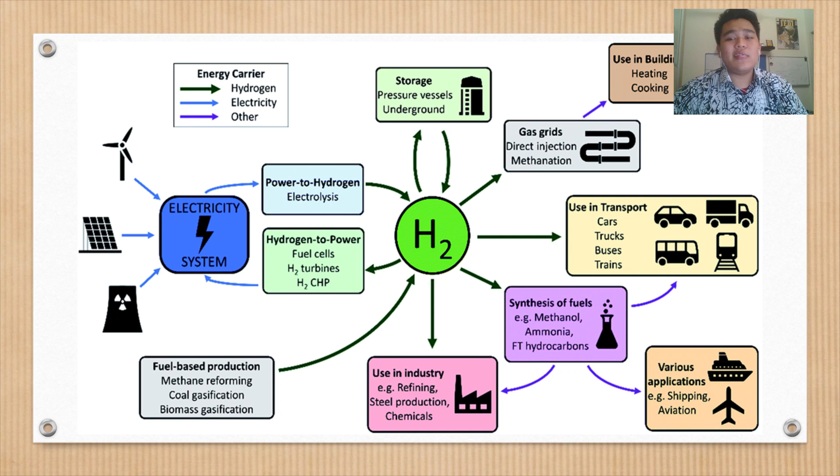Hydrogen is one of the leading alternatives for renewable energy resources to meet the high demand of energy across the globe. It has one of the highest demands in the chemical industry, 90% of which comes from fossil fuel derivatives such as methane, methanol, ammonia, and so on. It also has many other applications, such as storage, gas grids, and the electricity system.

Steam methane reforming, also known as SMR, is a catalytic process that involves a reaction between hydrocarbons such as methane and steam. The result is a mixture of hydrogen, carbon monoxide, carbon dioxide, and water produced in a series of three reactions.

Methane reacts with steam at 700 to 800 degrees Celsius. The SMR process is endothermic and requires additional heat to proceed. Therefore, a furnace is introduced to provide heat to the reformer. The reformer reactor accomplishes most of the methane reforming.

As for the water-gas shift reaction, this process is utilized to increase the hydrogen content, and the reformer products are fed to a WGS reactor where CO plus water produces CO2 plus hydrogen. The WGS is exothermic in nature.

For the type of reactor, a packed bed reactor is used as the reformer for both the SMR and WGS processes. This is because PBR is equipped with a catalyst bed, and since SMR is a catalytic process, PBR is chosen to ensure that the reaction occurring within the reactor is efficient. PBRs are tubular and filled with solid catalyst particles inside, and are most often used to catalyze gas reactions, with the chemical reaction taking place on the surface of the catalyst.

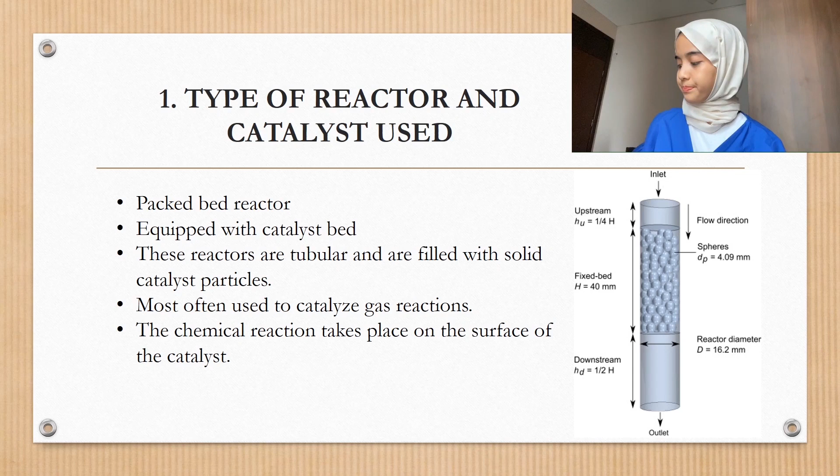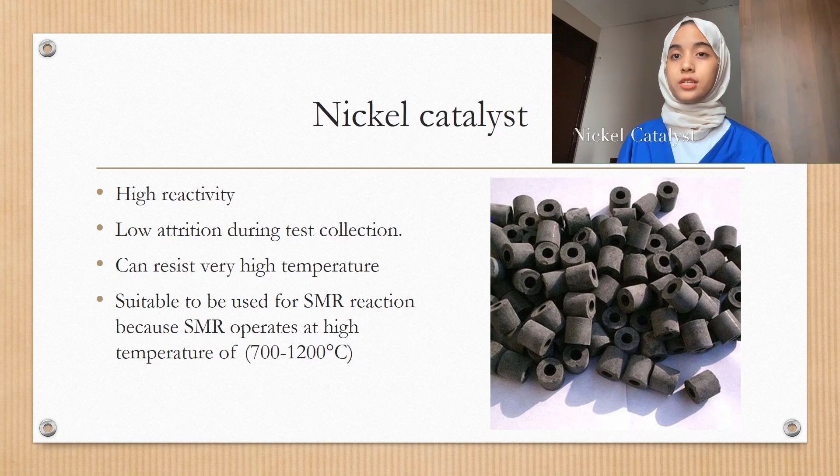The catalyst chosen is nickel because it has high reactivity, low attrition during test collection, and can resist very high temperatures. It is suitable for the SMR reaction because SMR operates at high temperature, between 700 to 1200 degrees Celsius. Next, how the packed bed reactor works for hydrogen production.

A typical packed bed reactor consists of a chamber, such as a tube or channel, that contains catalyst. The fluid interacts with the catalyst across the length of the tube, altering the chemical composition of the substance. For example, here for SMR, the reactants are methane and steam.

The methane and steam enter the tube and pass through this bed of catalyst, and this catalyst that we chose is nickel. This nickel will alter the composition of the reactants to produce our desired products, which is carbon monoxide and hydrogen.

The chemical reaction takes place on the surface of the catalyst, and the conversion is based on the amount of solid catalyst rather than the volume of the reactor. Therefore, it is important to determine the right amount of solid catalyst needed.

Tubular packed bed reactors with small diameter have the advantage of providing the highest surface to volume ratio. This results in decreased mass transport and heat transport resistance, making them attractive for achieving efficient thermal and mass transfer rates. Turbulent flow is preferred because we need that turbulence to ensure a perfectly mixed flow, to ensure we get high conversion of reactants to produce a higher yield of our desired products.

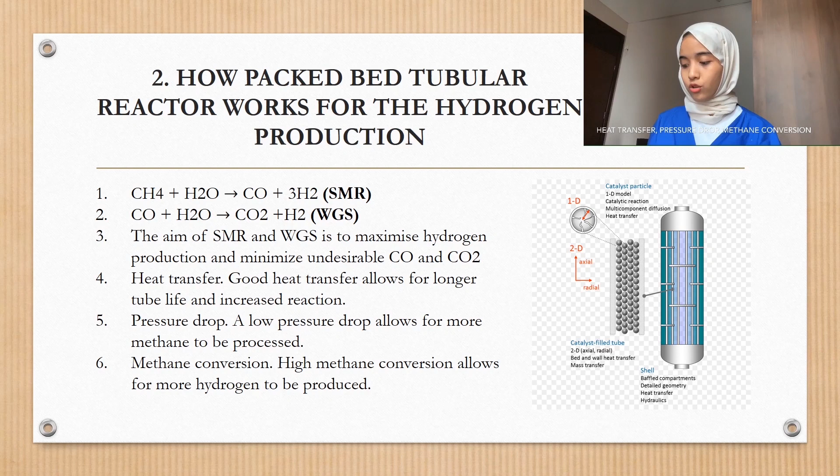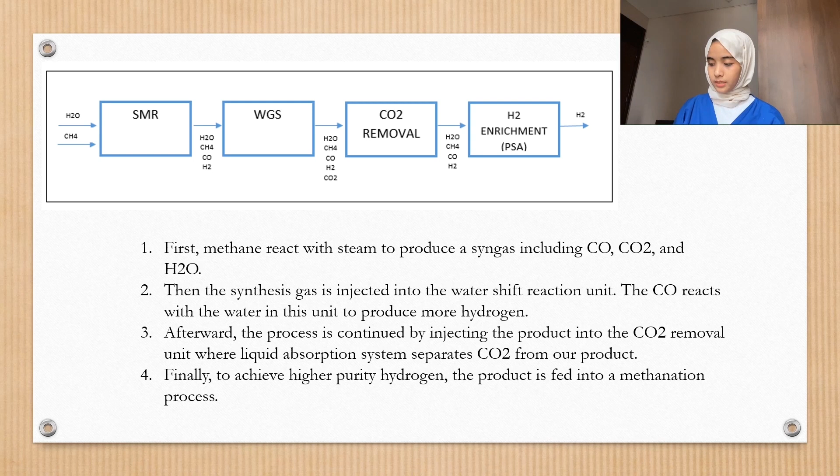Next, the process continues by injecting the product into the CO2 removal unit, where an absorption system separates CO2 from our product. Finally, to achieve higher purity of hydrogen, the product is fed into a methanation process.

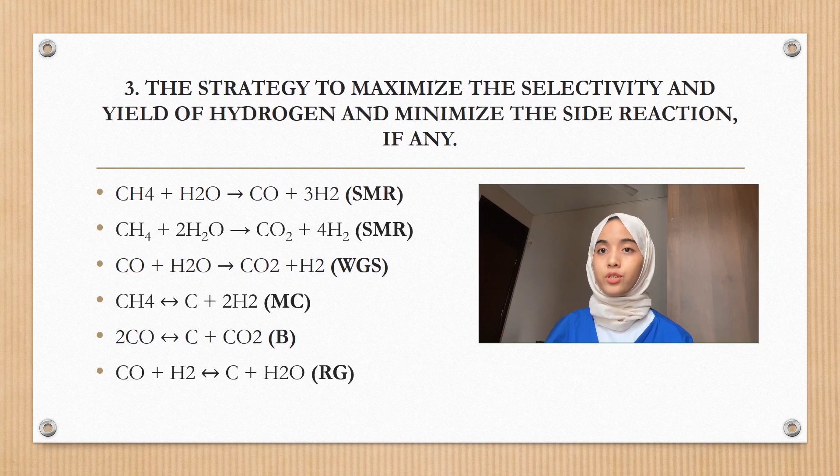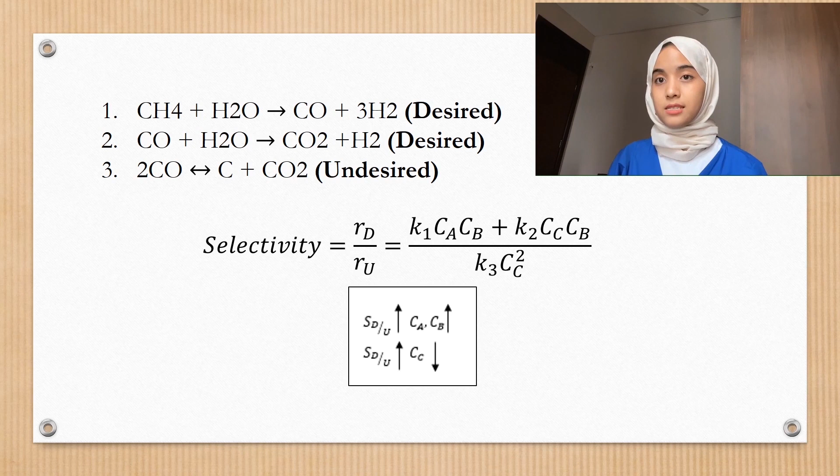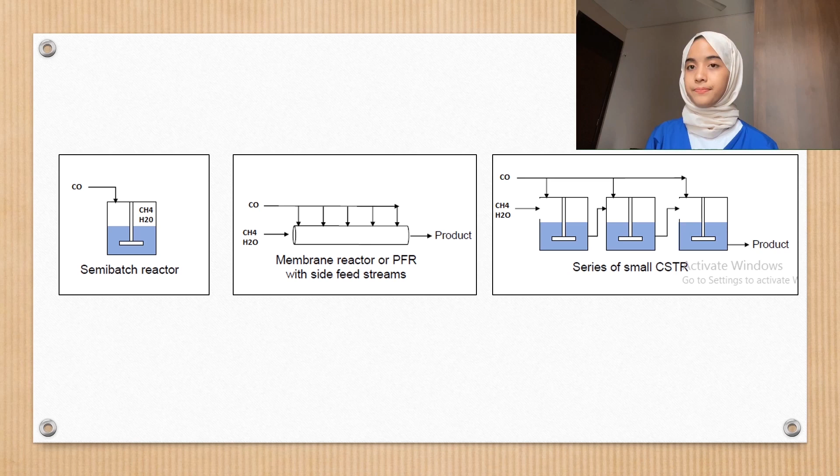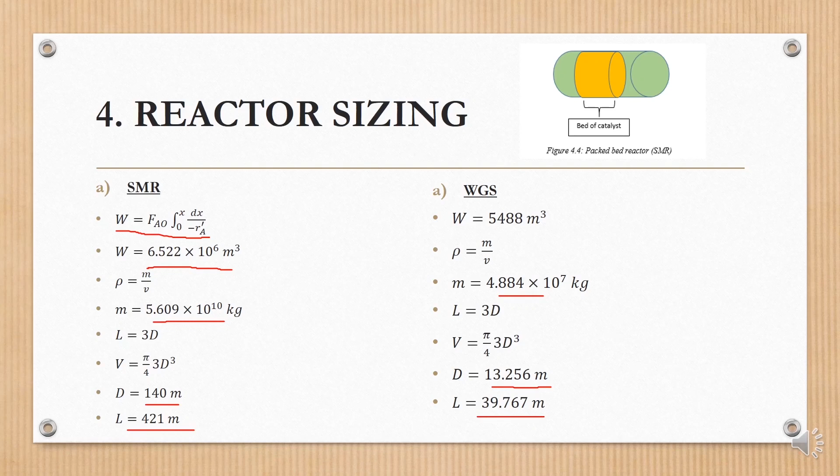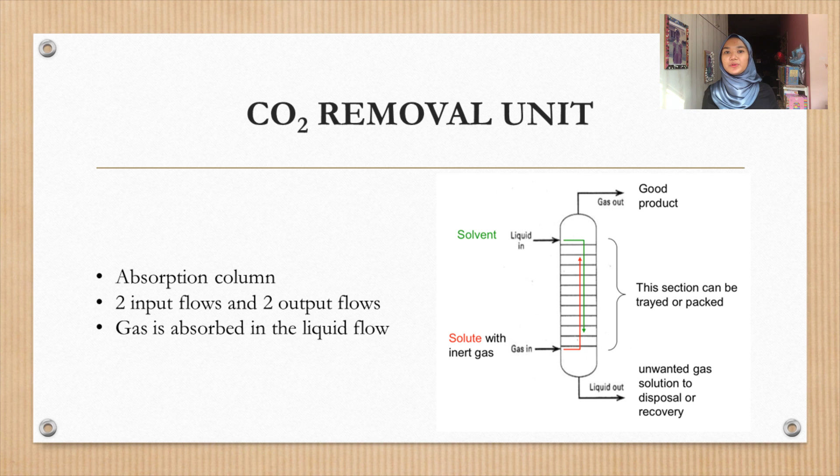Moving forward to our next column, this is the carbon dioxide removal unit. This particular unit is going to follow the application of an absorption column. Because it's an absorption column, there are going to be 2 input flows and also 2 output flows. In a typical absorption column, the gas from one of the input flows is going to be absorbed by one of the input liquid flows. Basically, if you look at this diagram, this is our schematic diagram for this particular system, where, as I said earlier, the gas is going to be absorbed by the liquid.

So basically in this situation, the gas is going to be carbon dioxide gas, and the liquid solvent, after having a thorough research, we have come to a conclusion that we're going to pick tetraethylene pentamine, or short form TEPA, as our liquid solvent.

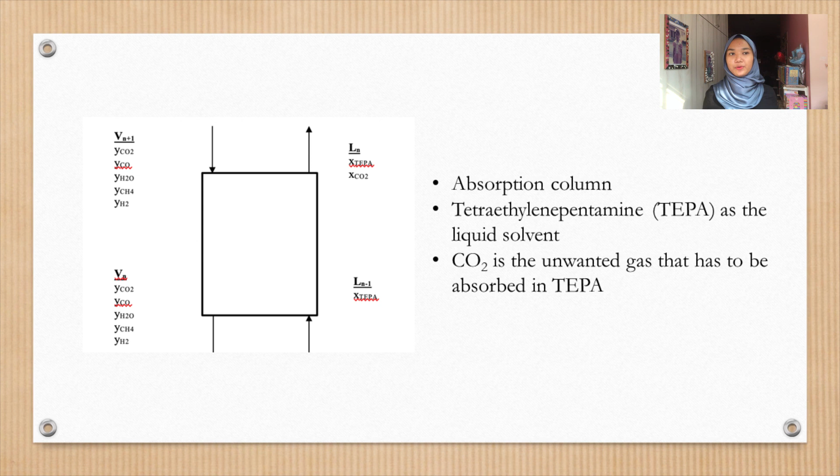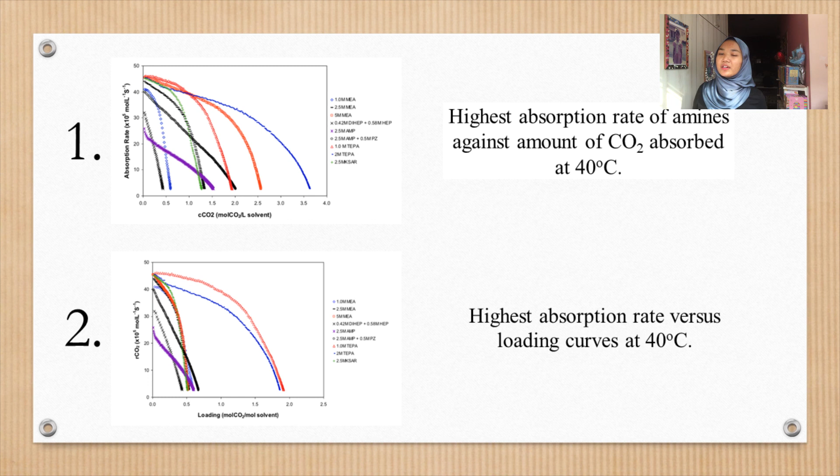Okay, so after picking our liquid solvent, we have to make our assumptions so that we can ease our calculations later on. I'm just going to highlight a few important assumptions.

One of them is that other components in the system are not going to be affected by the absorption process, meaning that this particular CO2 removal unit is just going to affect the amount of carbon dioxide and also the TEPA. So the amount of carbon dioxide entering is going to be larger than the amount exiting, hence carbon dioxide removal. Also, another assumption is that the amount of TEPA entering the column is going to be equal to that exiting, so it's going to make it easier for us to calculate at the end of the day.

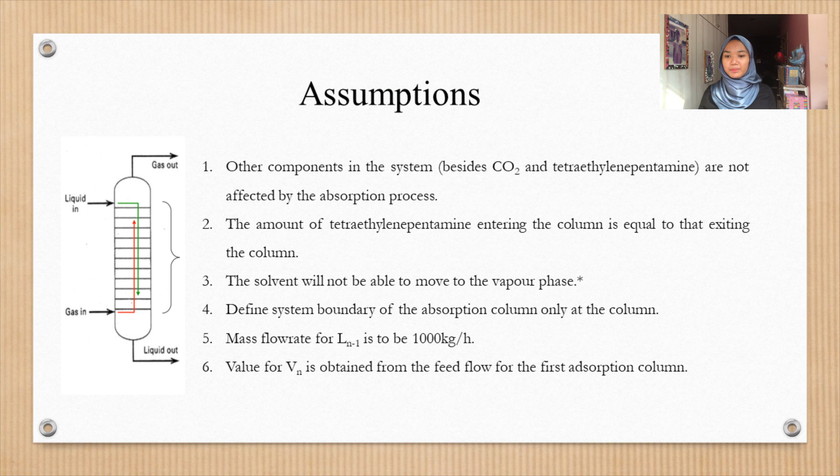And also we have to make sure that we define the system boundary as only the part of the column, so that nothing else like the surroundings is going to interfere with our calculation. Yes, the others are also important, but I'm not going to highlight them in this presentation.

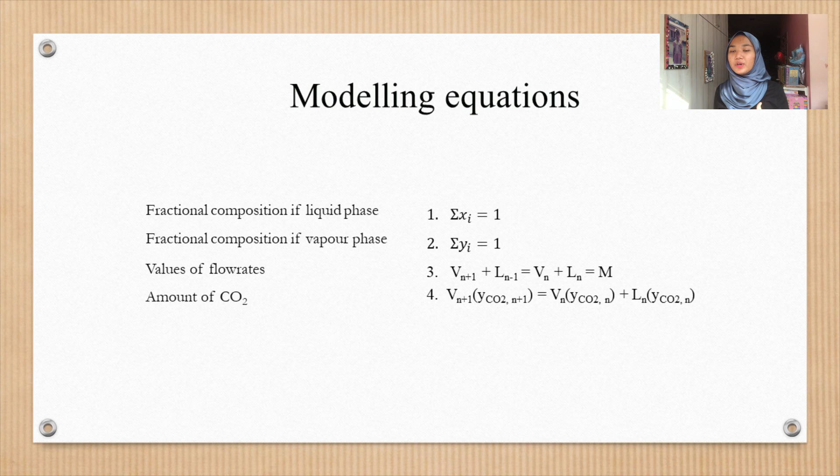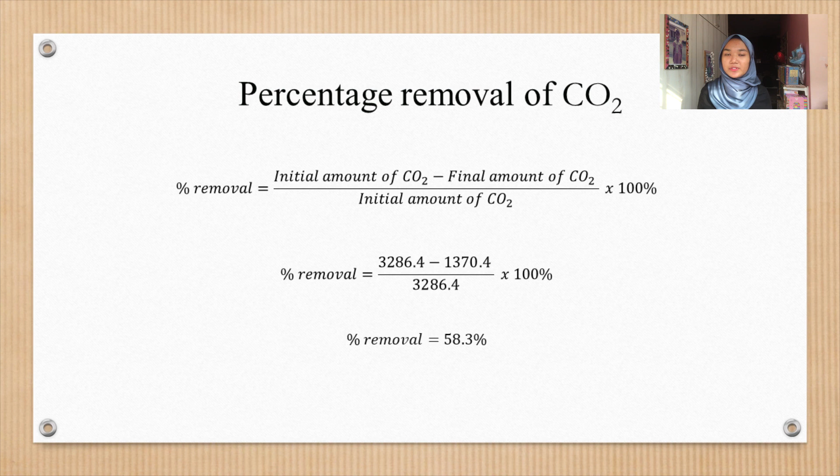Okay, so once we are done with all these calculations, we have to conclude on the efficiency of our carbon dioxide removal unit. Because of that, we have to count the percentage removal of carbon dioxide, which, from this particular situation, after calculating, our percentage of removal is 58.3%, and that is quite high for the removal of carbon dioxide.

That's all. The upcoming slide shows the selection of adsorbent, which is activated carbon and zeolite. It is essential to determine the types of adsorbent used, as it affects the overall rate of adsorption and overall plant efficiency.

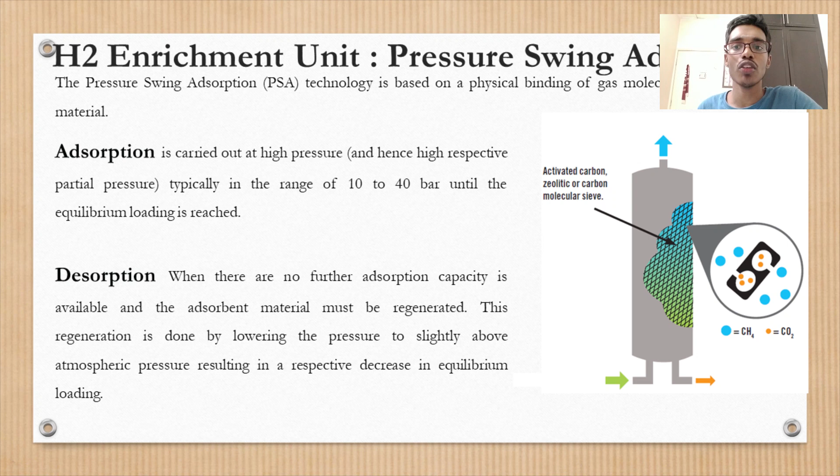The activated carbon has a greater surface area and microporous ability, which is why it is a very good adsorbent. It involves precise regulation of regeneration cycles. Its adsorption capacity is highest for CO2, followed by CH4, CO, N2, and finally H2. This suggests its selectivity towards CO2 is very high, while its selectivity to H2 is very low. Thus, the activated carbon will only adsorb a minuscule amount of hydrogen in its loading capacity.

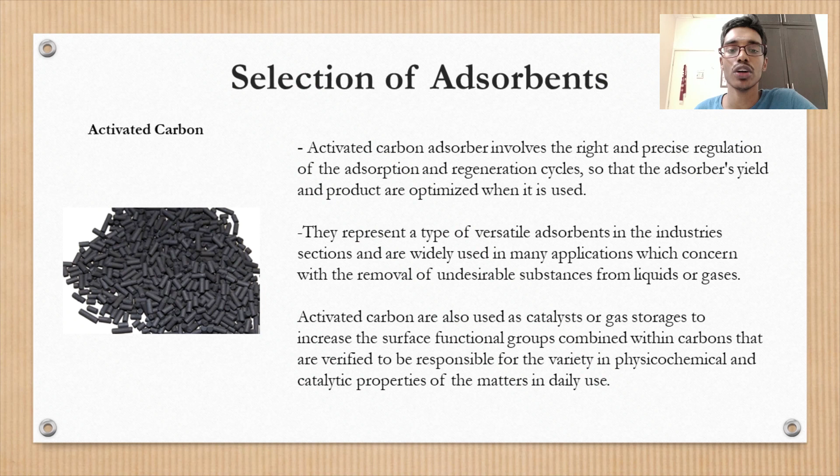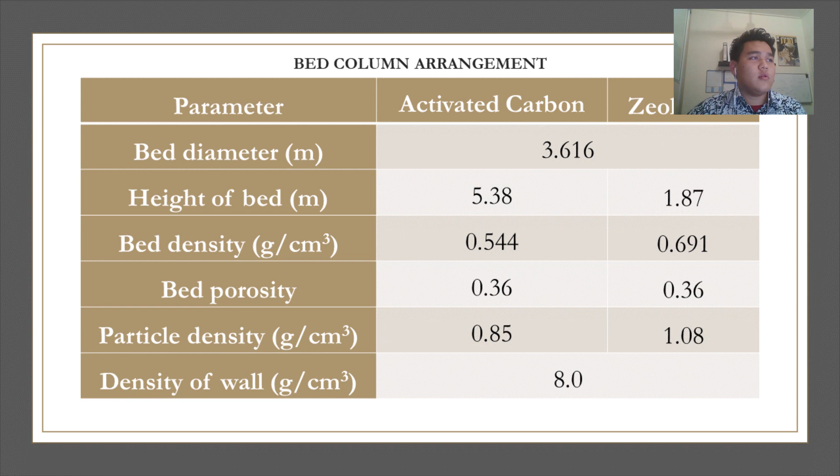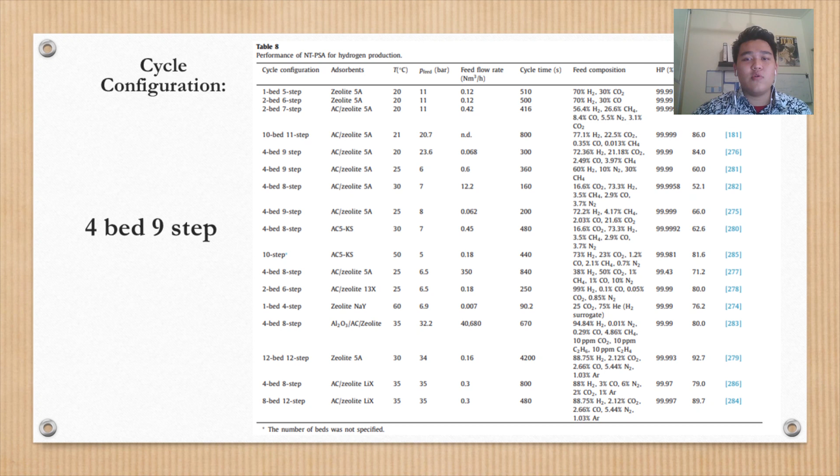We gathered some information from the article, which tells us what the adsorption column is going to be like. For the cycle configuration, we decided to go for the 4-bed, 9-step configuration, as we think this is the most favorable since it has the highest purity and highest recovery rate. This is just to visualize what the adsorption column will look like.

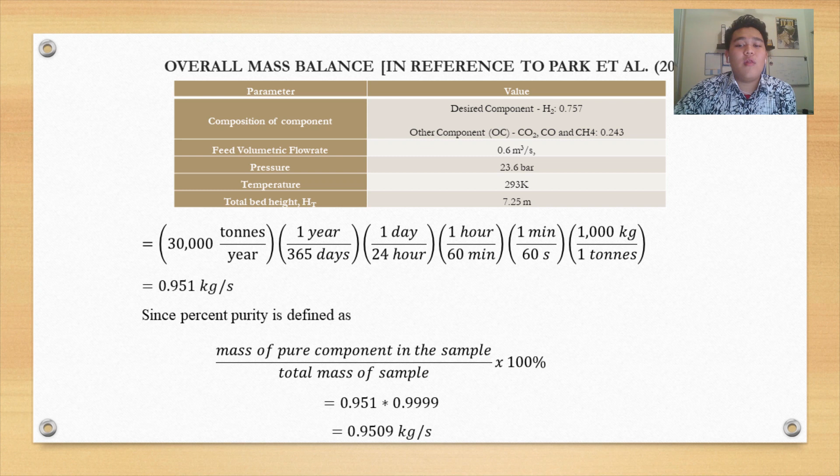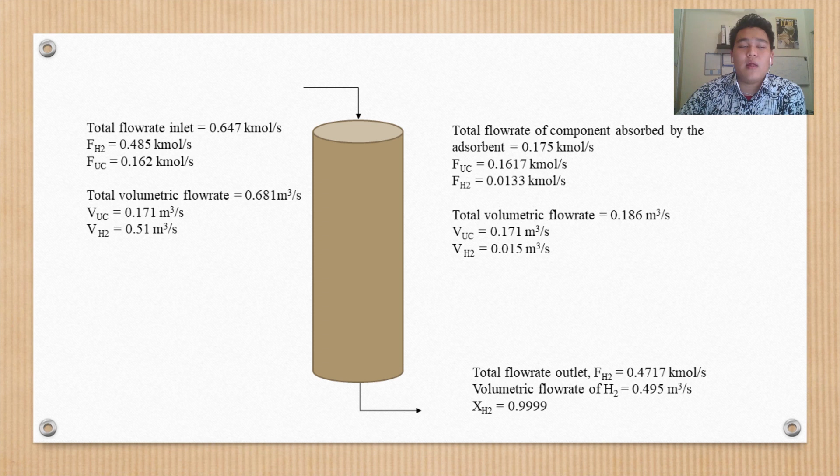Let's talk about the overall mass balance. First is the composition of the components fed to the adsorption column. We are given the mass flow rate, so we convert that into molar flow rate and need to find the density before converting that into volumetric flow rate. From the volumetric flow rate, we know the compositions for the feed as well as the outlet of the adsorption column, so from here we can find the mass balance and determine the total volumetric flow rate going out.

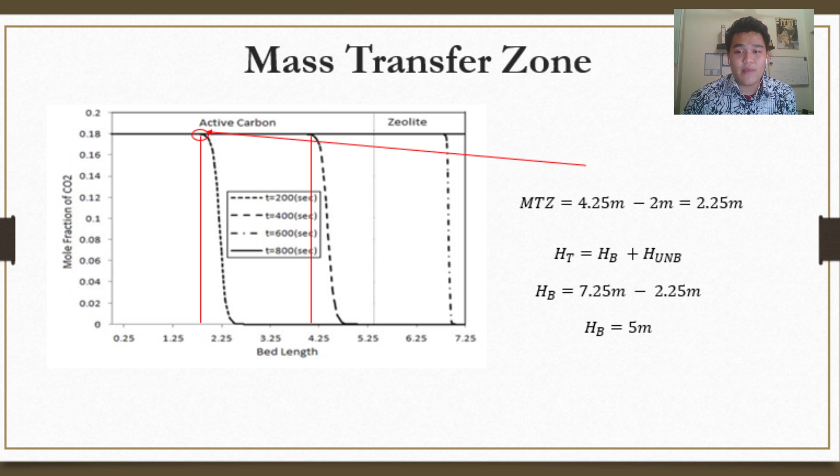As highlighted in the red lines, they are the mass transfer zone, indicating the unused bed. So we can know the height of the bed, which is 5 meters. For upscaling, we just use the formula to get HB new, which is 5.44 meters. Then we use the ratio HB new over HB equals TB new over TB to find TB new.

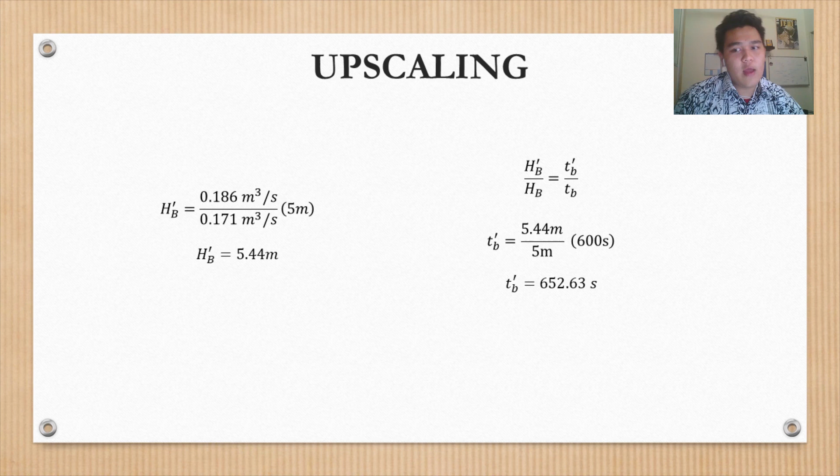That comes out to 652.63 seconds. There are 6 strategies.

First, we need to use process modeling and simulation software, because they can deliver faster and much more accurate results and predictions for these expected calculations. Next, we can increase the PSA columns. If we have more, it's shown that nowadays there are available designs with up to 12 beds and 8 steps, which can achieve better results with less impurity.

We can also increase the mass transfer zone by scaling up the bed length and internal diameter of the column, since it's directly proportional, so the MTZ will also increase. When we reduce this time, it results in higher kinetic limitations, resulting in an increased mass transfer zone.

The fifth strategy is having an efficient regeneration and recovery rate. Lastly is suitable operating conditions: for adsorption, it requires high operating pressures with low temperatures, whereas with desorption, which is an endothermic process, it needs high temperature with low pressures.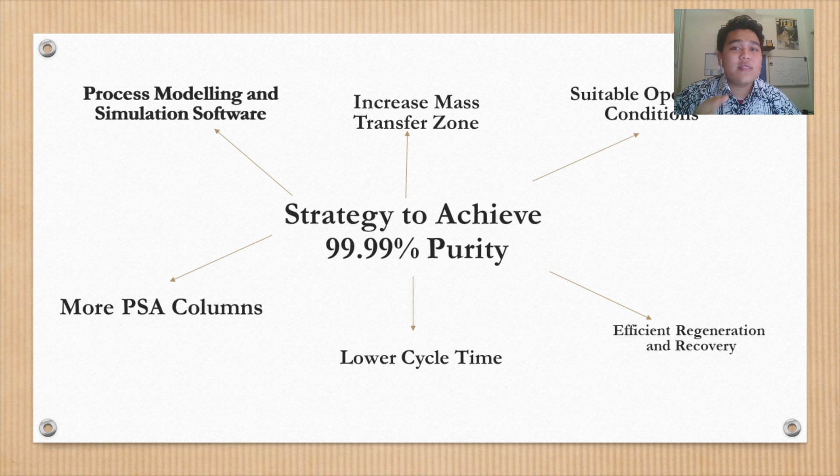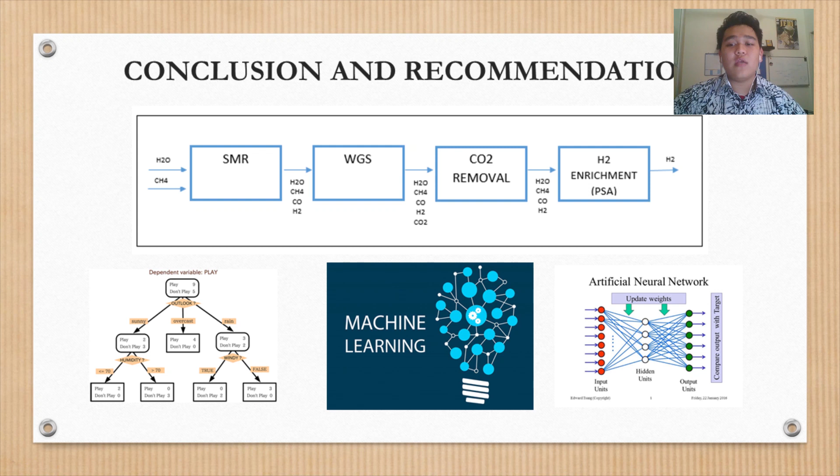In this presentation, we've talked about every single unit process, including SMR, WGS, CO2 removal, as well as the H2 enrichment unit, which is the adsorption part. In the future, we can use this for better predictions and calculations, so we can compare our manual calculations to the simulated ones. We could also use machine learning now, such as decision trees and artificial neural networks.

Lastly, we'll talk about reflections on our group project. Our submission was quite last minute, and we think that's because we were just shy and not confident enough to speak up or encourage each other to start working better and faster. Evaluating why this happened, it's because we didn't have enough teamwork due to lack of communication and common understanding. Going back to the root, it goes back to communication, because communication is key. Without that, we cannot really work together.

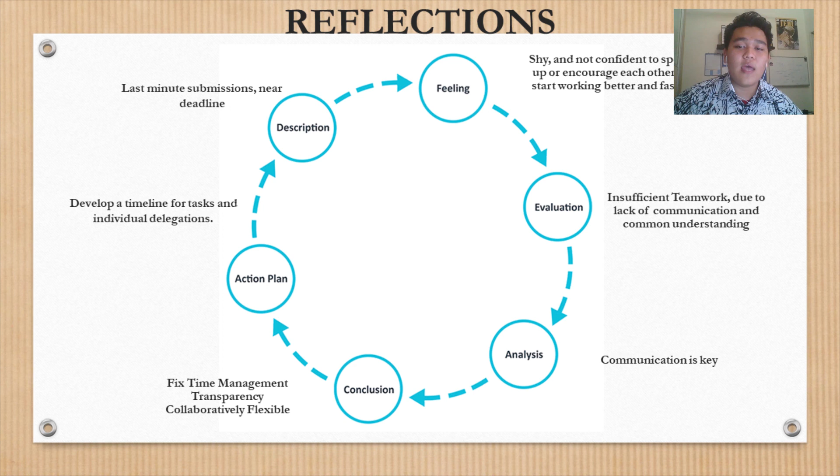As a measure, next time in the future we would have more fixed time management, and maybe more transparency in how we work, as well as being collaboratively flexible with each other. Our action plan is to develop a timeline for tasks and individual delegations, so we can stick to them and be more strict about them.